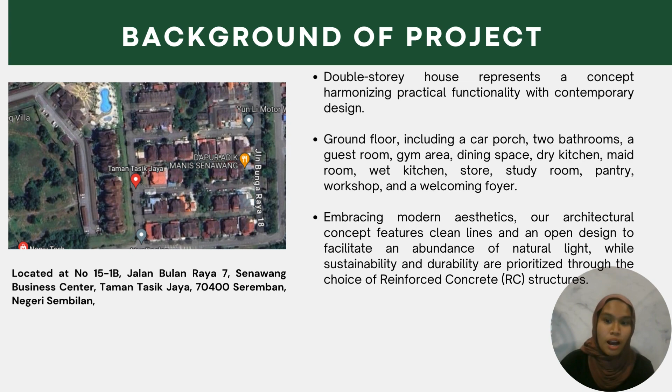Next, I will present about the cost of the project. For this project, the standard cost per time for each activity is set to ensure the resources for specific tasks are in accordance with the document contract.

This method helps guide the project to be completed efficiently within the budget and time limit provided. For this project, the total cost is about RM200,300, and this cost includes all the work completed for the project.

Microsoft Project is used to manage resources, make schedules, and keep track of time. It is a collaborative work and project management tool that allows you to work however you choose. The benefits of Microsoft Project are: first, it maintains users, organization, and focus; second, it's easy to use; third, budget management capability; fourth, project resource forecasting; and fifth, flexibility.

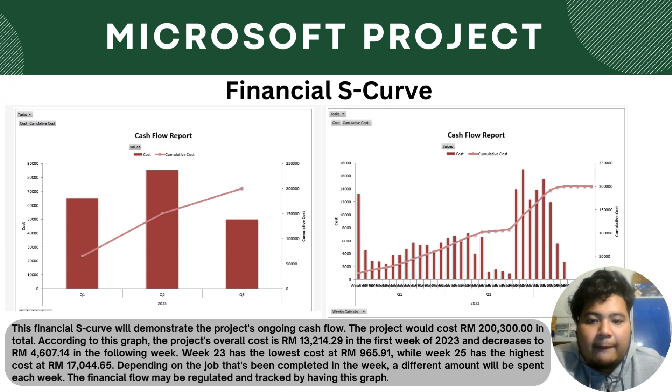The physical S-curve is used for planning and monitoring the progress of the project's work. Users are able to monitor their progress on a weekly schedule and by cumulative percent completion.

The physical S-curve shows that the project's construction will be finished in 35 weeks. This graph shows consistent work overall, as the proportion of work completed is not significantly different week to week, and also shows the weekly progress being made towards the building project's completion.

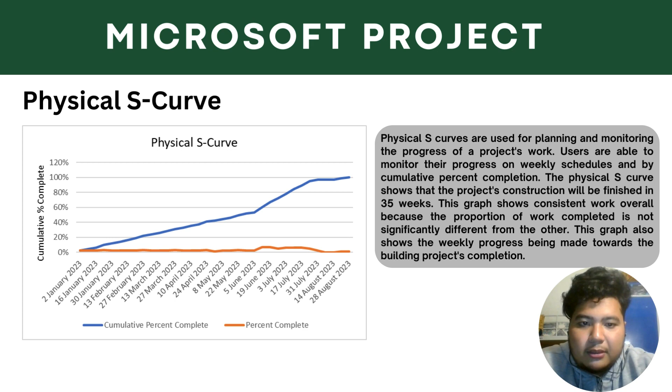Project information for parameter data. The title of project is Rezqi Company and the location is at Negeri Sembilan. The duration of project is 157 days and the total cost of this project is about 200,300. The start date of the project is 1 February 2023 and the end of the project is 1 September 2023. The not working day is on Sunday, and the progress report 7 times.

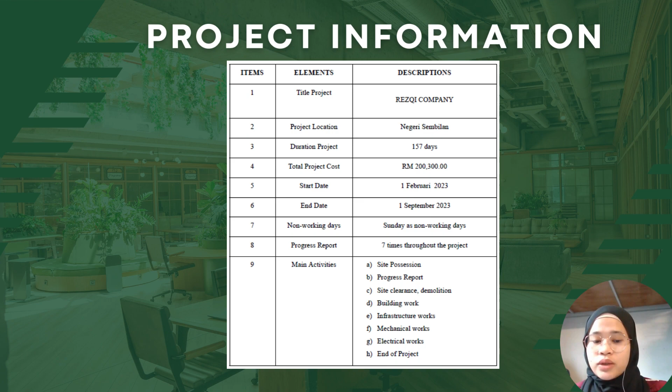For the main activity, we have site possession, progress report, site clearance, building work, infrastructure work, mechanical work, electrical work, and end of the project.

Public holiday and working hours for our project located at Negeri Sembilan: Sunday is off day. Monday until Friday, working time starts from 8 a.m. until 5 p.m. Saturday is half day, starting from 8 a.m. until 2 p.m.

And we got 9 public holidays.

For the work breakdown structure, the project visual hierarchical and deliverable oriented breakdown is presented by a work breakdown structure, WBS. This is an important tool for the project, planning the work breakdown structure chart for every stage of the project work. The list of the WBS starts with the project start.

The second is the preliminary: we have performance bond insurance, establish and removal of site, and a 7th progress report. Then land acquisition and earthwork, including site clearing, excavation, backfilling, and leveling. And we have piling work.

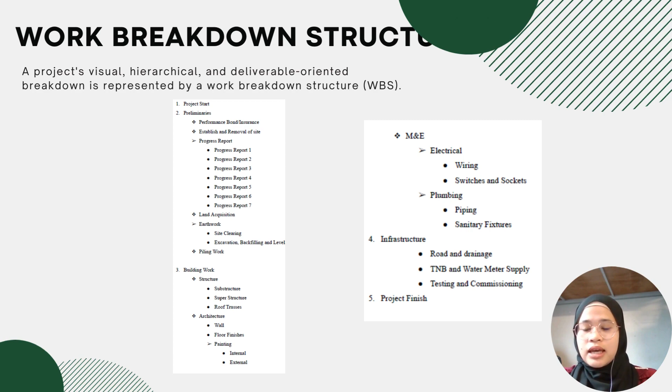For the building work, we have structure for substructure, superstructure, and roof truss. For architecture, we have wall and floor finishing, and painting, internal and external. We have M&E, which is electrical and mechanical. And infrastructure, including road and drainage, TNB testing, and lastly project finishing.

For this construction project, we use Esteem software to analyze the house plan. Based on the following picture, it is a double-story house designed in Esteem. We start with the ground beam, then analyze to determine the error, and once all errors are corrected, we proceed to level 1, and lastly to the roof beam.

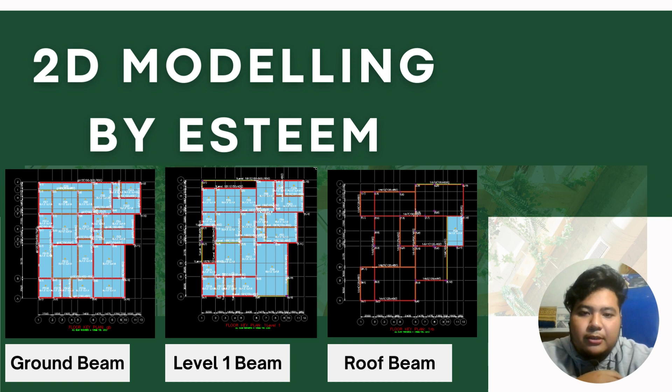The design of beam that we choose is GB10. For the overall calculation, depth H is 4500 divided by 13, so the answer will be 346 millimeter. For the width B, the calculation is 0.4 multiplied by H, so 0.4 multiplied by 346, the answer will be 138 millimeter. For this design of beam, we use B multiplied by H, which is 150 multiplied by 450 millimeter.

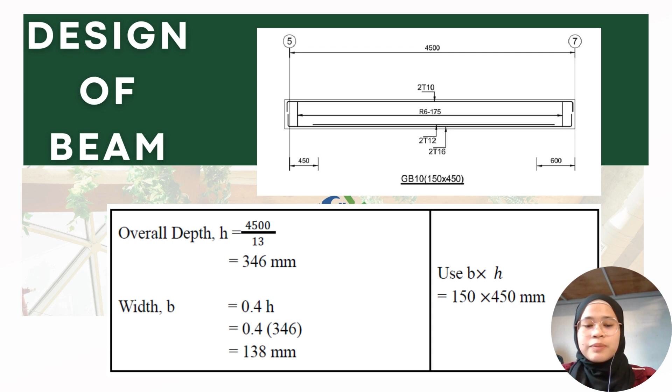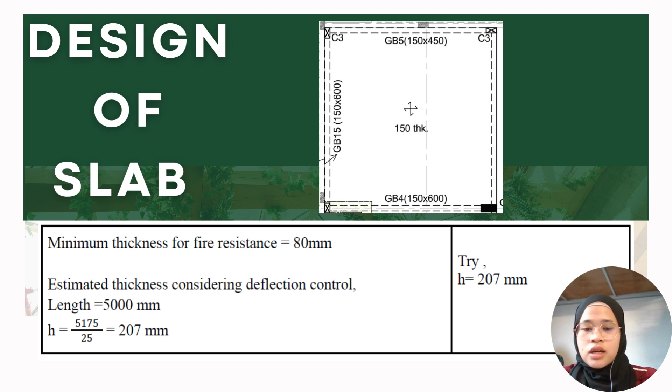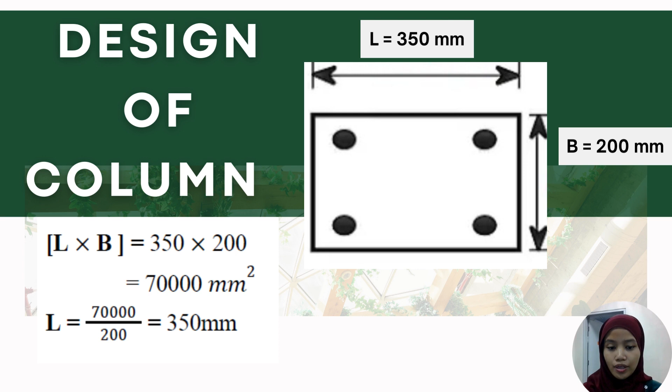For discussion on Esteem, we eventually finished the RC construction home after overcoming challenges. For the beam size, we have different sizes for ground beam and level 1: for the ground beam, the size is 115 multiplied 415 and 150 multiplied 500. But for the roof beam, this project is 125 multiplied 415 for level 1.

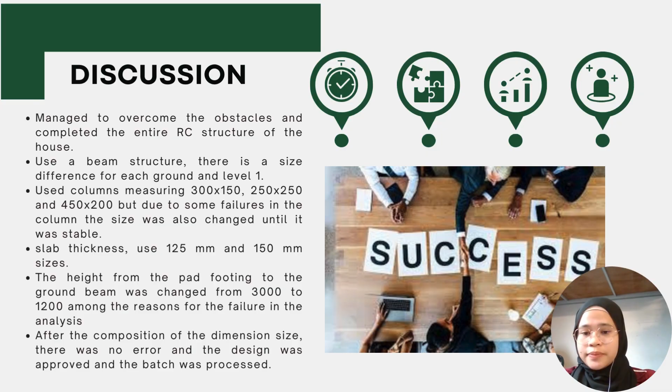The design was accepted and the batch proceeded. In conclusion, we managed to overcome challenges in Esteem software RC framework development, showcasing adaptability, and we completed the entire RC construction, demonstrating the team's ability to navigate obstacles.

For recommendation: pre-implementation simulations and prototyping. Implementing pre-implementation simulation or prototype is crucial for our design process, allowing us to identify and address potential issues on a smaller scale before final batch processing, ensuring a more efficient and error-resistant structure design. This way, we can catch and fix any problem early on, making our overall design process smoother and more reliable.